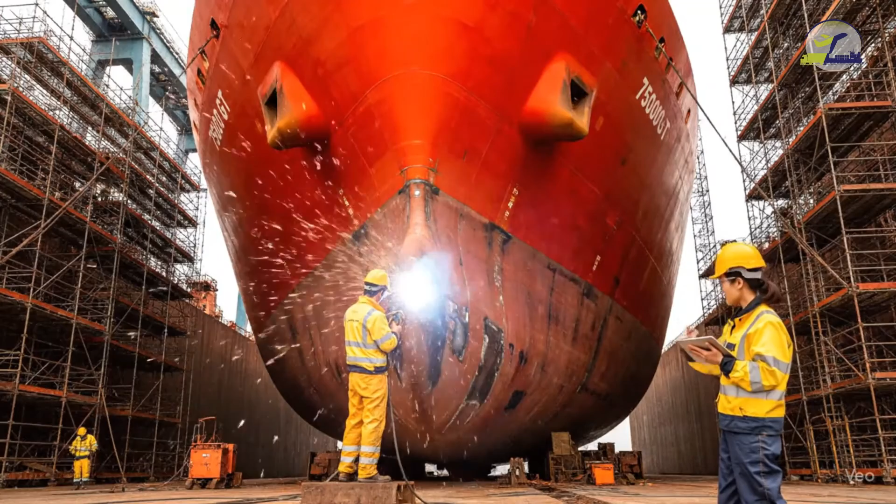And the last port could have fixed everything in half the cost.

I hope you enjoyed the video. Now, Smart Maritime Maintenance and Operations Platform is a combination of a predictive maintenance system and a blockchain-based spare parts platform to enhance safety and efficiency in the shipping industry.

Here comes the problem statement, which is mainly unexpected failure of different parts of ships, which causes disruption in ship's operation.

One of the biggest challenges in shipping is operational disruption, especially when the engine or propulsion stops working properly. The ship needs dry dock, and by butterfly effect, the whole supply chain will be affected.

Unplanned breakdown not only stops a ship, it can cause huge financial cost. As a result, a single failure can cost millions, once you consider the delay and revenue lost from the overall delay and disruptions.

Our solution is built around the predictive maintenance system. Using real-time sensors, we can constantly track things like vibration, temperature, oil quality, and fuel performance. And if we find any kind of anomaly, by using machine learning or artificial intelligence, we can track within how much time the machinery can fail, and we have to go for a repair.

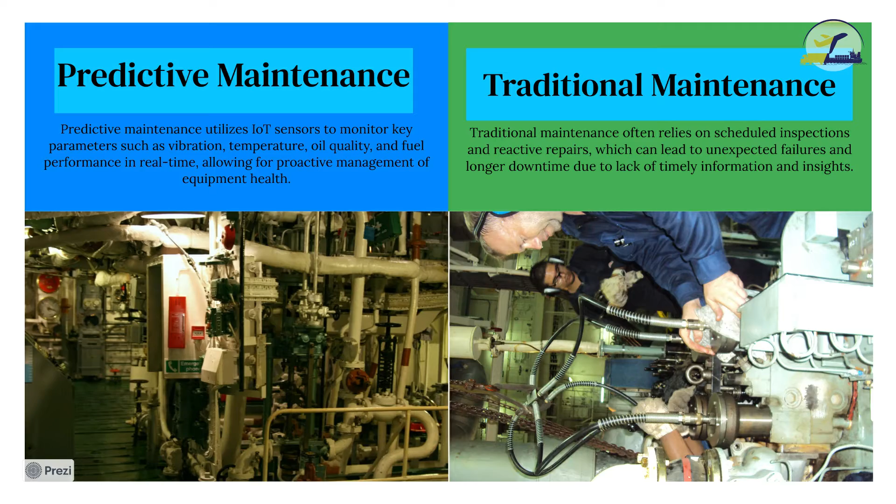There comes the challenges faced for emergency dry docking. Emergency dry docking is the scariest situation a ship owner can face. When a vessel needs emergency dry docking, prices go from thousands to millions in a very short time, just because it's an emergency. And the problem gets worse if the port you are going to doesn't have the service you are seeking.

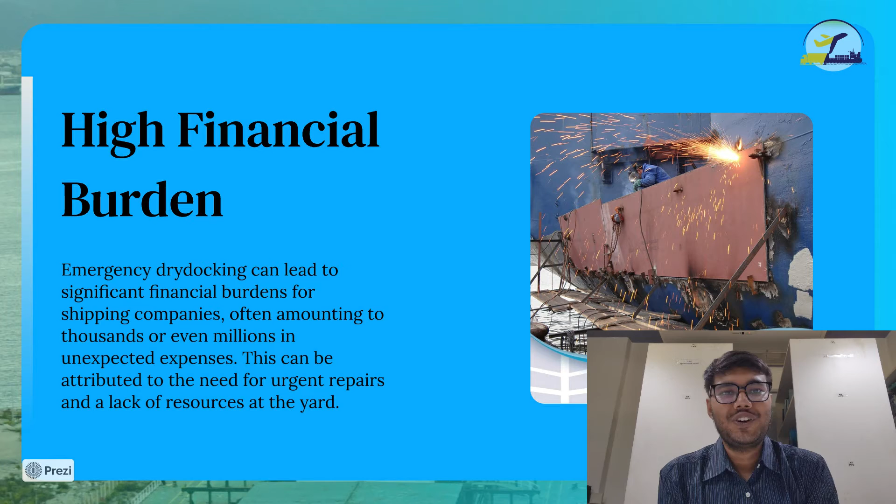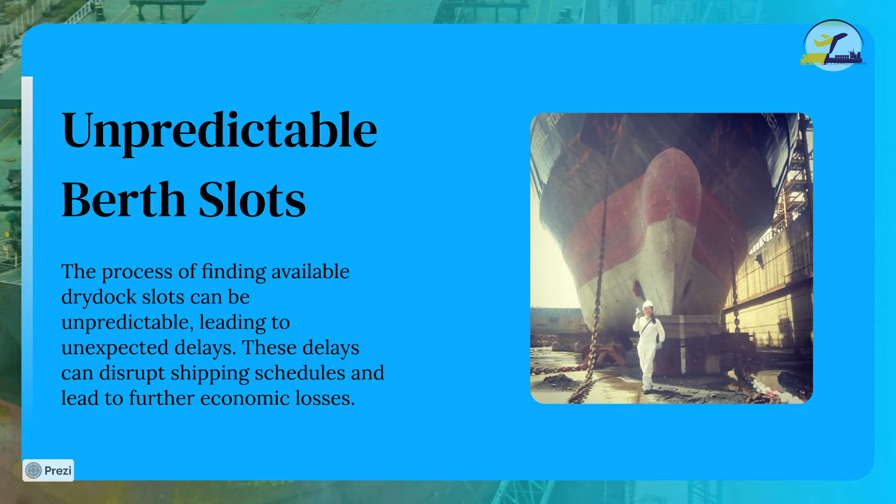Another challenge is unpredictability of dry dock slots. Think you are going through a very busy port, and for dry docking you have to wait for the next 12 hours. So that's actually a 12 hour operational cost loss.

Not only this, emergency dry docking often comes with inflated repair costs. As the ship needs urgent attention, that attention also comes with a price, which escalates depending on the emergency and depending on the rarity of the parts.

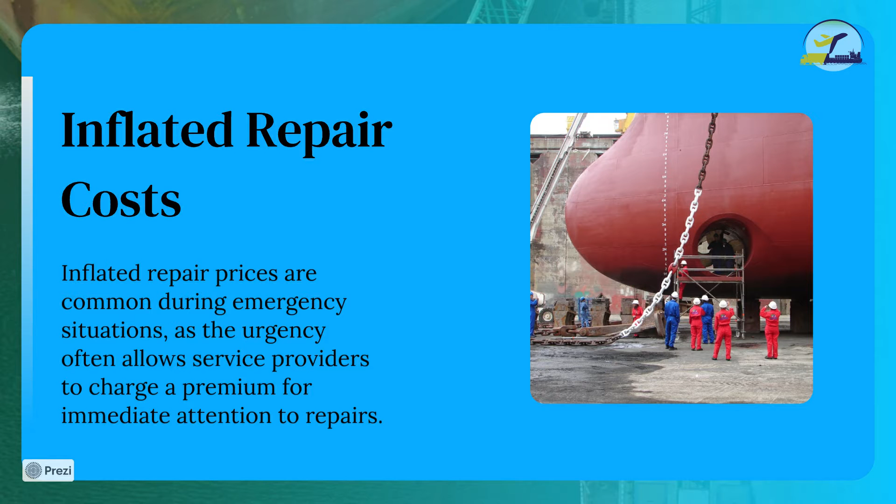Now, as a solution to this problem, we introduced the blockchain-based spare parts marketplace. This platform will connect ship owners directly to suppliers, ensuring transparency in pricing and availability.

Our vision is an integrated maintenance ecosystem. By combining the predictive maintenance system with the blockchain-based spare parts marketplace, we can make it seamless. We can make the system more reliable, more friendly, and there will be no cost surprises as well.

So early detection is the key. The predictive maintenance system lets us know what part can fail within a 3 to 21 day window, which lets ship owners act very early. So downtime, delays and surprises, those are just words from the past. They don't exist in this new era of shipping.

The moment the fault is detected, our platform secures a dry docking slot and orders the needed spare parts, which makes the whole process a lot easier, as the platform already has the list of all the ports nearby who are delivering those spare parts and who can provide the dry docking facilities which are needed.

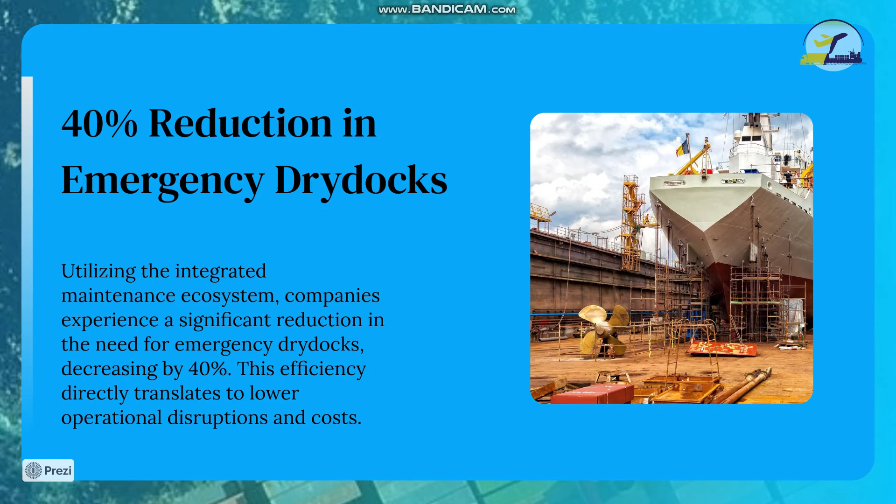The predictive maintenance system can boost the ship's operational time by 25%, as there is no need for regular daily checkups for dry dock. Rather, you can just go to dry dock when it's necessary or when you are actually facing a problem.

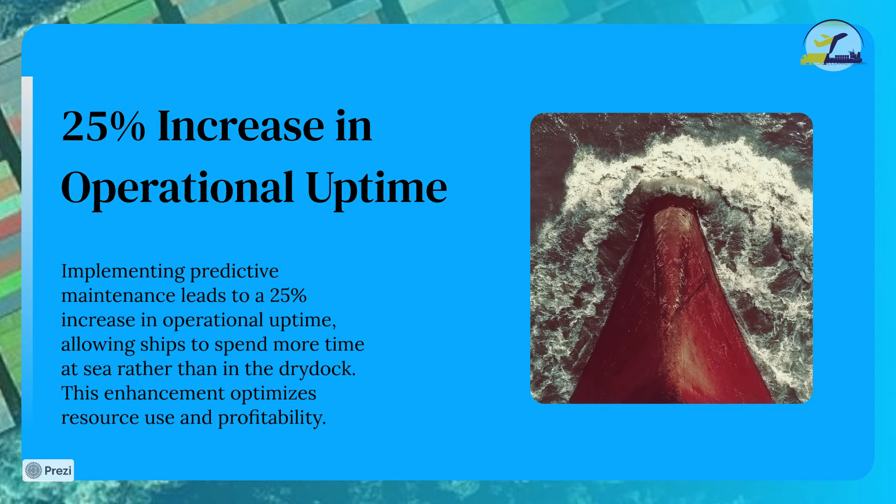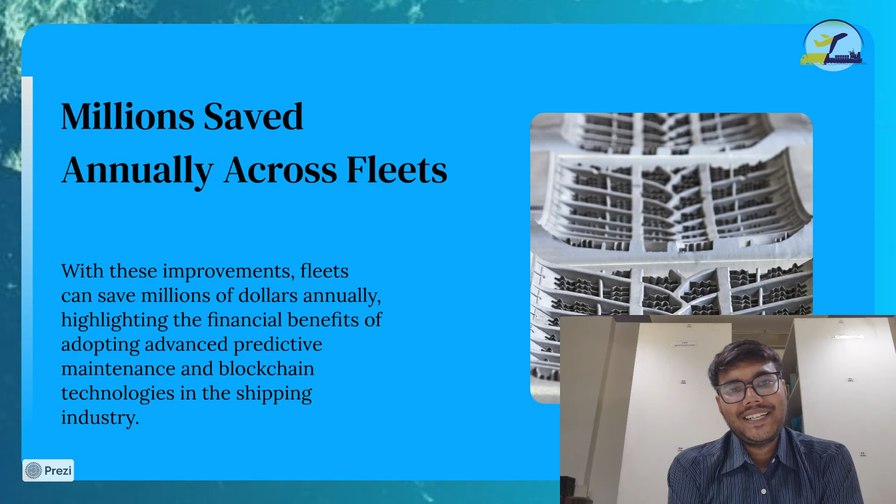Overall, this predictive maintenance system and blockchain based marketplace can allow you to save thousands and millions of dollars across the whole fleet by just using it and by avoiding the accidents that we could have faced.

Smart maritime maintenance and operations platform is not just one technology, it's a combination of predictive maintenance system and blockchain, which makes the whole shipping industry revolutionize for its uniqueness of not facing any kind of accident when you know the future already.

By using this technology, we can make the ships safer, the maintenance proactive, and the operations far more efficient. So this is revolutionizing the maritime industry by changing the way it works.

It doesn't require the IMO regulations to actually make you dry dock. Rather, the predictive maintenance system will tell you earlier than usual when and how you need to dry dock, where will be the least costly option and what will be the least delayed option.

So you will know early when you are going to go through which part of the maintenance system, and a smart contract makes this far more easier with automated payments and tamper proof payments. So this is the future we are seeking for, and this is the future we are going to.

Now, do you think this technology is only useful for shipping companies? Wrong. This technology is actually very useful for small ports, because small ports can focus on the dry docking facilities and their spare parts facilities, which will eventually turn the ships to their port, and you can charge for the dry docking. By this, small ports also become useful, and the port congestion in large ports can also be reduced.

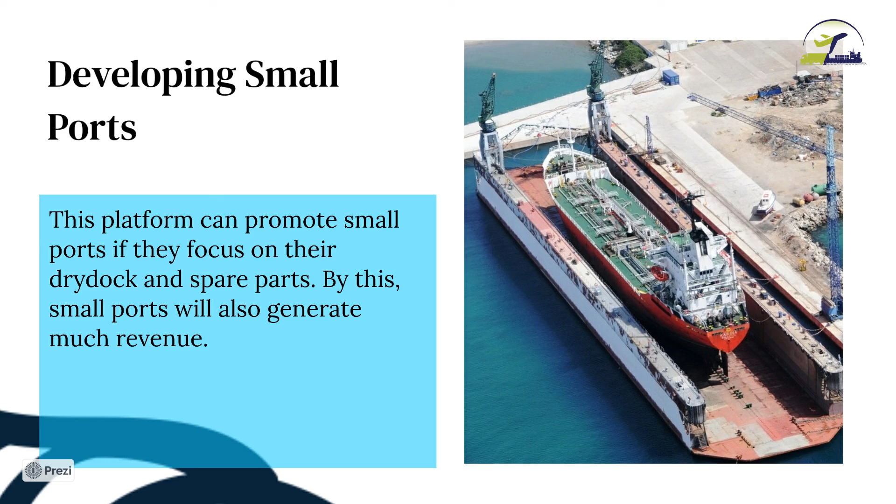So by this whole scenario, everyone is benefited: the port authorities, the spare parts dealers, the blockchain operators, the predictive maintenance system operators, and also the shipping company. So it is a benefit for everyone, and this implementation can revolutionize the whole shipping industry by a lot, especially by ensuring safety, trust, and seamlessness.